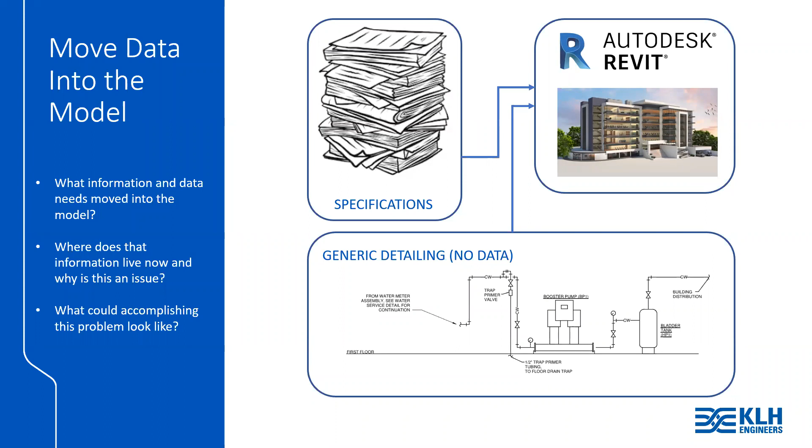So what are the solutions to these two problems, essentially? Two initiatives that got started at KLH as a way to address this were, first, to just get rid of them. So the two goals: the first one is eliminating that generic detailing. So how do we do that?

You can see that kind of booster pump bladder tank example from the previous page. This is what we show. So what do we really need to be doing? You can see that this is really what we want installed, and what we really should be modeling, in order to give the contractor what they need to install. So this is...

Kind of the same setup. It's essentially fully modeled—it has all the valves, all the families, all the piping modeled. Essentially what replaces the generic detailing is, it could be a section view like what's shown here, that's fully detailed, outlining what everything is. You can see it's even got some dimensions on it, that really gives the contractor a good idea of what my design intent was as an engineer.

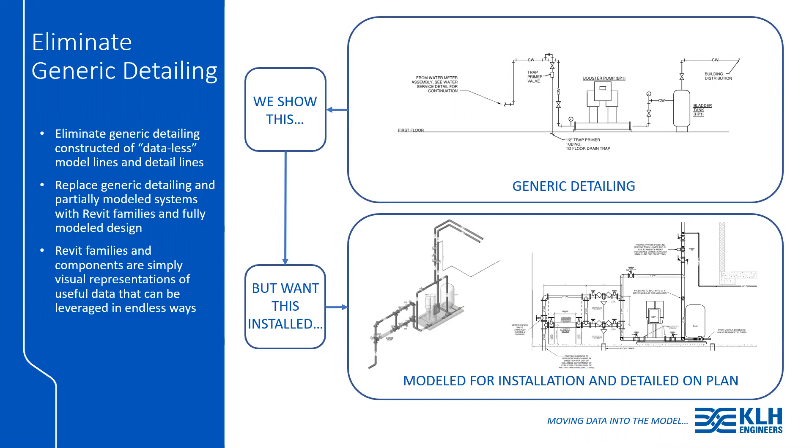So that second goal that we started at KLH was essentially to eliminate specifications as well. And we quickly learned when we set out to tackle this that the first thing we needed to do was basically look at our specs, comb through them, and eliminate redundant, useless information. We were kind of surprised to see how many times the same information may be repeated over and over again in specifications—sometimes even contradicting themselves, which just adds confusion to the contractor.

So this was kind of our initial result. Here you can see all the disciplines listed, and these are some pretty serious values here. From HVAC alone, we eliminated 781 pages from the specification. 76 from fire protection, 61 from plumbing, 249 from electrical, and 161 from technology.

So once we got that redundant information out of the specifications, we needed to keep going—thinking about how we're going to keep chipping away at our specs. And essentially, as an example here, the way to do that is you start showing information that's in the specifications on the plans themselves. So you can take...

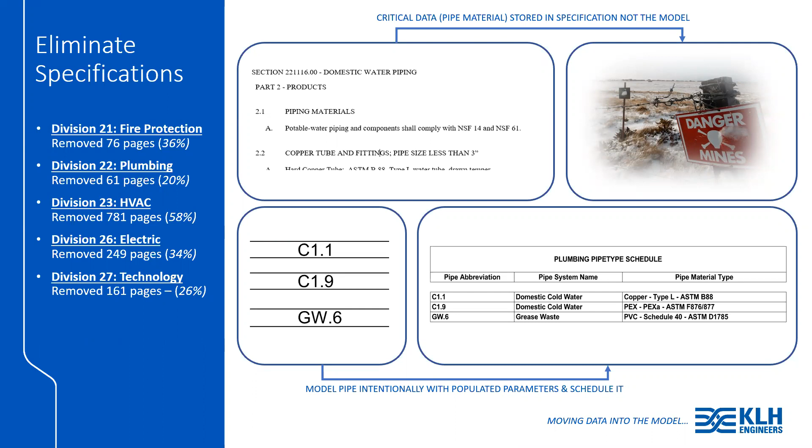I'm going to play a video here, but this is a tool we created that the technology team uses. It's called Plate Designer, and they essentially use it to build each specific data plate that exists on the job as they're placing it. This is voiced over, so I'll see how the volume is.

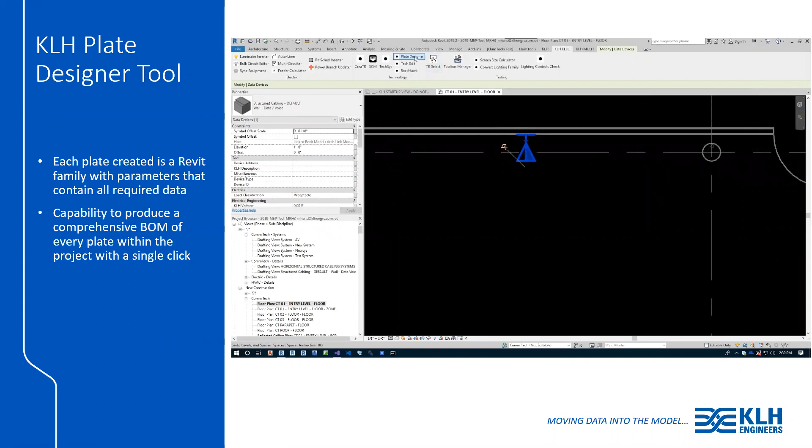Plate Designer is one of the tools available for designing technology systems. This tool allows us to take an ordinary data symbol and add more information to it. For example, I can design a plate and specify the number of gangs, specify the color of the plate, and add connectors to this.

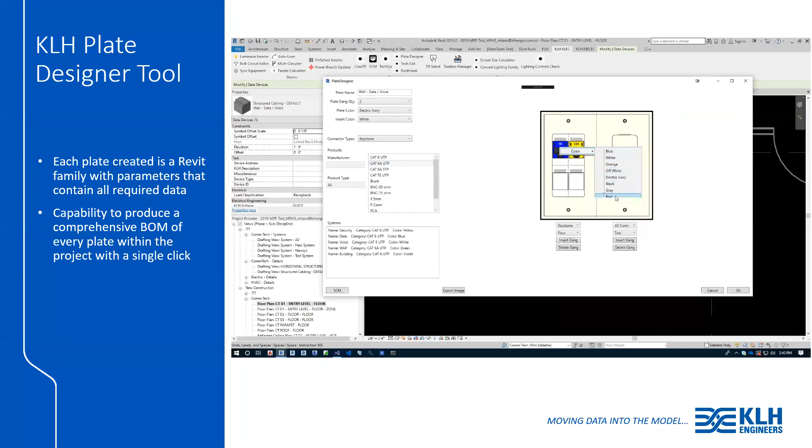Now, by adding these connectors, I'm doing more than just adding an image to the plate—I'm actually adding the product that contains a model number. These model numbers can be used to develop a bill of materials for this plate and all the other plates on the project. I'm able to change the color of a connector without adjusting the model number.

I'm also able to add structured cabling system connectors that are defined at a project level, as well as AV connectors that could go to a local AV system.

So essentially, the old way of placing these things was a generic symbol on plan. It was a Revit family, but it did not have good data. So what this is doing is associating with that specific family, in this case down to a manufacturer model number, what that exact plate is.

So you can imagine, if you had done this for your entire job, we could have the ability to pull a report from our Revit model that has the exact count, model number, etc., for every single one of these things in the job.

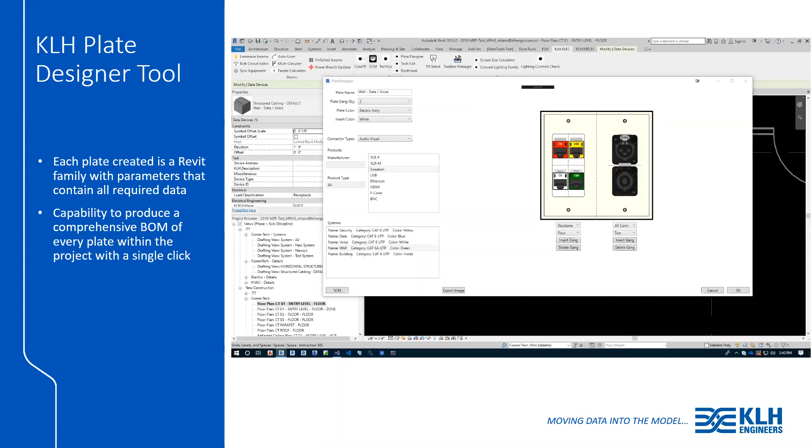I wanted to touch on point cloud integration, since we're in this 'move data into the model' category. Like I mentioned, here at KLH we have a BLK 360 building scanner. It's not the perfect fit for every job, but it can have value.

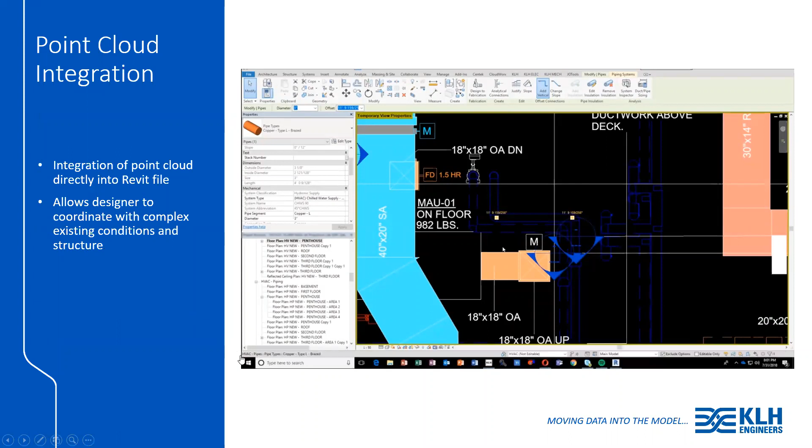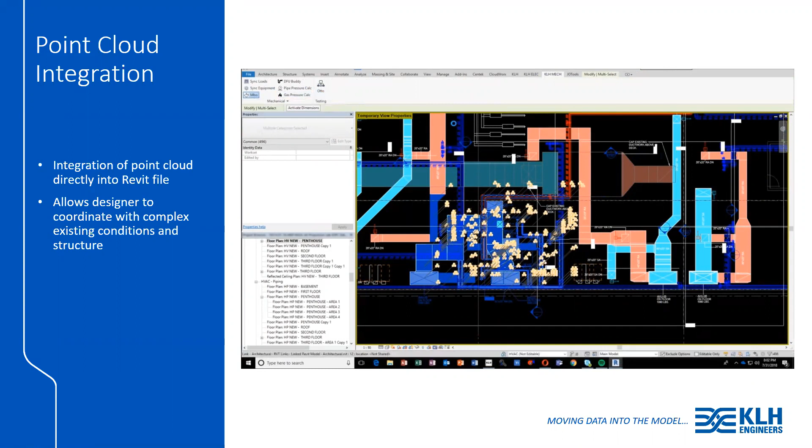I think you'll see in this video—start it right now. Essentially, you can see a somewhat complex ductwork plan. He's going to use another tool we made; he drags a box, and it quickly makes a 3D isometric view of just those elements.

He's going to mess around with it a bit, play with some view templates. You can start to see the model there a little, but he's going to tweak the view template more.

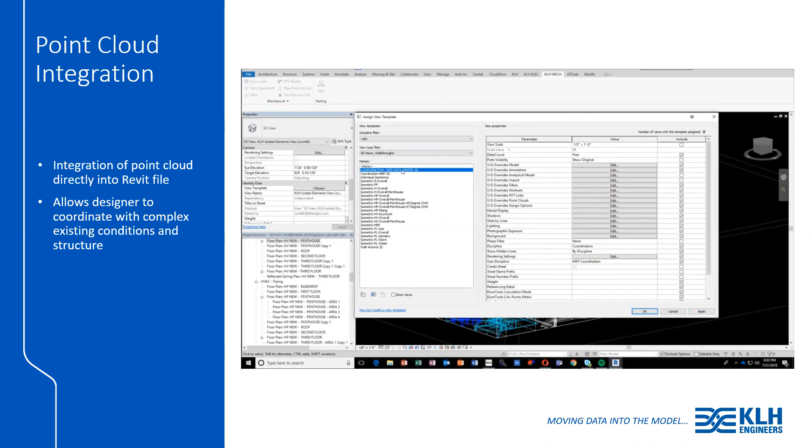This is kind of the view that shows you the best, and he'll start to rotate it around. You can see these cross-structural members here. I think he's going to rotate it some more—these guys right here, coming out of the ground.

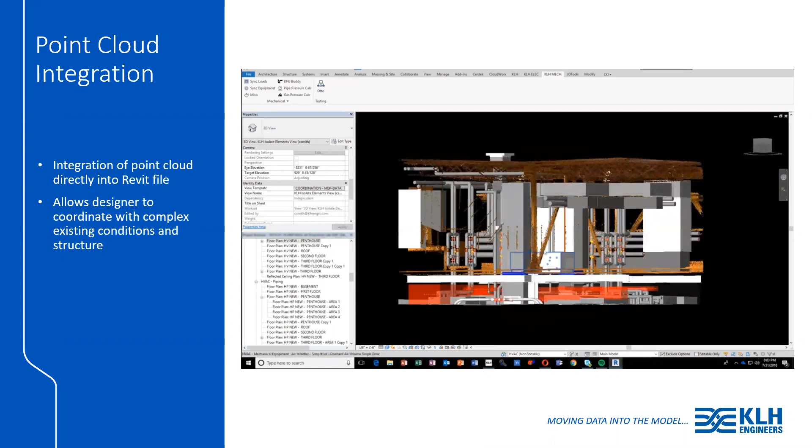You can imagine, on a more traditional site survey, an engineer may be trying to filter through 1,000 site pictures, trying to get a good idea of what obstructions may be in this specific area. These structural members coming out of the ground at an angle are something that could really easily be missed.

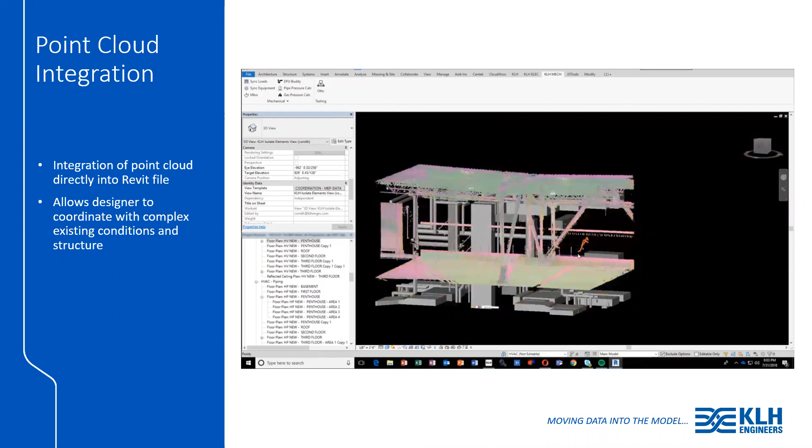And when you're running large ductwork where alternate routings aren't just going to be coming a dime a dozen, having that information when you're actively modeling can save a lot of heartburn down the line when you're trying to get that ductwork installed.

Does anyone have any experience modeling with a point cloud—remodel, or beneficial, or yeah?

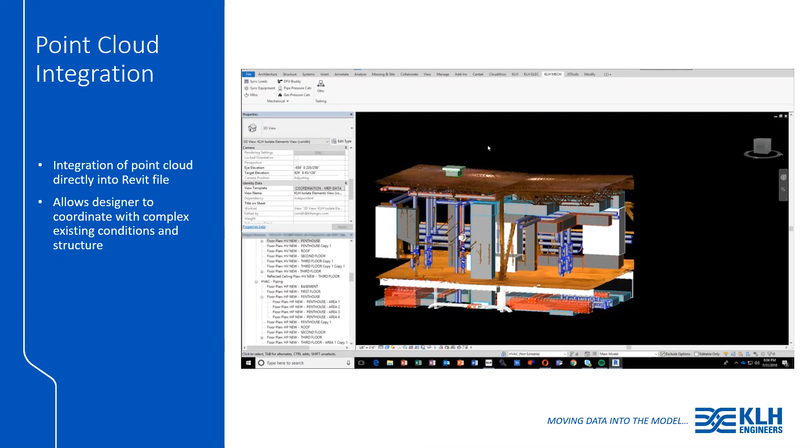So, the title of this slide kind of says it all. We've been talking about moving data into the model and how important that is, making it a better model. But why are we doing that overall?

At KLH, essentially what we've done is mirrored the data in all of our models into a single database that we can manipulate and organize however we see necessary. So what that's doing is maximizing the data that exists in every single one of our Revit projects.

So you can imagine, if you wanted to look at the last 20 hotels we did, and how many PTAC units may have been on each one, if you don't have this data somewhere where it's searchable and you can work with it, you're not going to know the answer to those questions quickly.

So I just wanted to touch on this—why the data is important here at KLH for us.

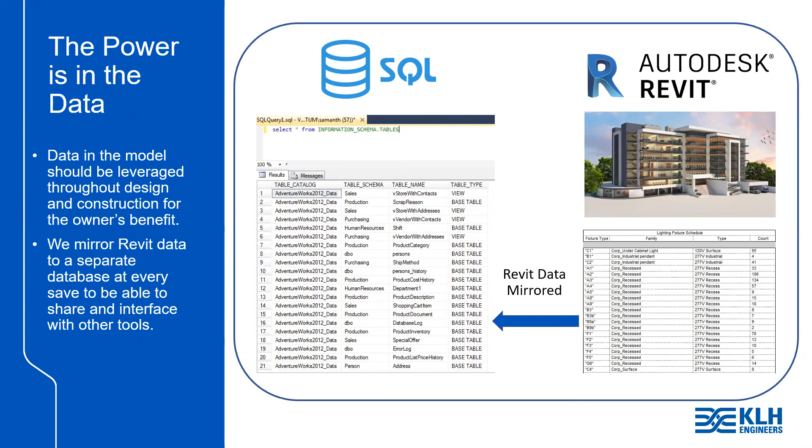So the next topic, we talked about moving data into the model. We're going to go into achieving that coordinated model. I know we're all familiar with the terms clash detection.

Software. I've never really heard anyone arguing why clash detection is important and how it can be a positive thing. It's never going to be a bad thing if I find out that I drew a 10-inch storm pipe into 24-inch by 24-inch stuff. Knowing that that's happened is always good.

The problem that I always hear with clash detection when I'm talking to architects and engineers is that the current software that is out there on the market just isn't cutting it for their workflow or for how they're set up, for various reasons.

Inefficient in the sense that it's not fully integrated into the Revit model. It's an iterative process. I'm exporting models maybe into another program, seeing what the clashes are, maybe then I'm going back to Revit, making some adjustments, then I'm exporting again. It's kind of an inefficient process.

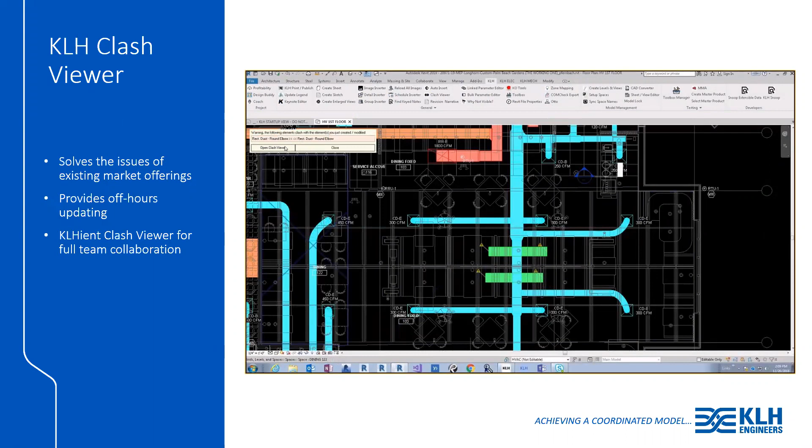Makes sense. I can actually launch the real-time clash viewer window. These are all the clashes that are in the project, listed and organized by priority factor, which is a factor of the volume. So a 1,000 cubic foot duct is going to be higher priority than a half-inch pipe.

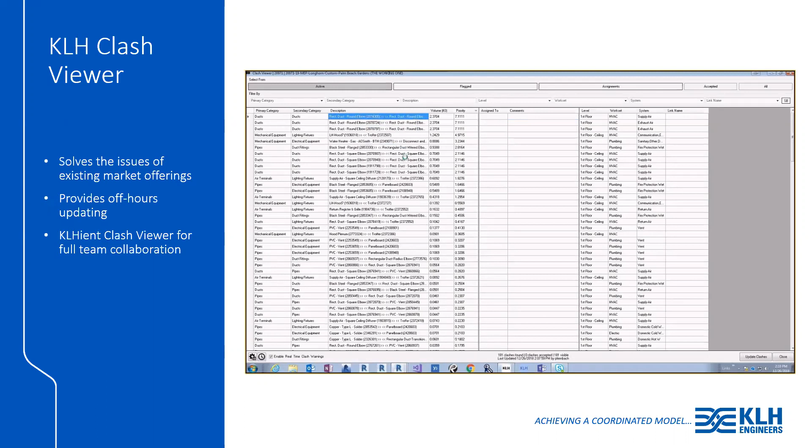I can go through these clashes. I can assign them. I can flag them. I can accept them, and I can also put comments on here. And I can show the clash in a 3D isolate view to make it easier for me to navigate and understand what's going on.

So you can kind of see from that video how what we developed really helped touch on all the pain points we had from the out-of-box software. He essentially drew a duct through a duct intentionally, for the purpose of the video, but you could see a pop-up screen kind of come up here in the corner, told him right away that he drew something that would not work in the field.

And one of the biggest things for us at KLH is, right now clash detection is kind of viewed as really reactionary and really far down the line of the construction process, where essentially the design is getting completely done by all the engineers, all the architects, and we get the model, and then clash detection starts. Just kind of backwards from how it should be.

So this tool is allowing us to be coordinated with ourselves, be coordinated with all the models that we have linked in to our models.

So that was kind of our first goal, essentially get clash detection software that solved all of our issues and worked for us. That's great for us at KLH, obviously. But what's the progression? What's the next thing?

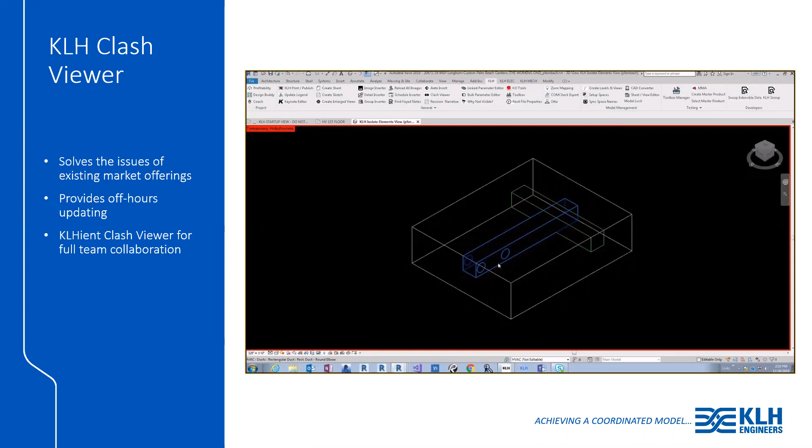Whereas typically what we'd be doing is sending a screenshot saying, hey, I need the wall changed from 2x4 to 2x6. We might have a couple more back and forth emails, they may be making changes in their model, and a week later we might get an updated model and finally the wall is 2x6. So it's been working out well for us.

All right. We've got some data that we've been tracking on all of our Revit models across the entire company.

So what we did is basically every new project that got set up, the live Clash Viewer was turned on, and every user had to make a conscious decision to turn it off.

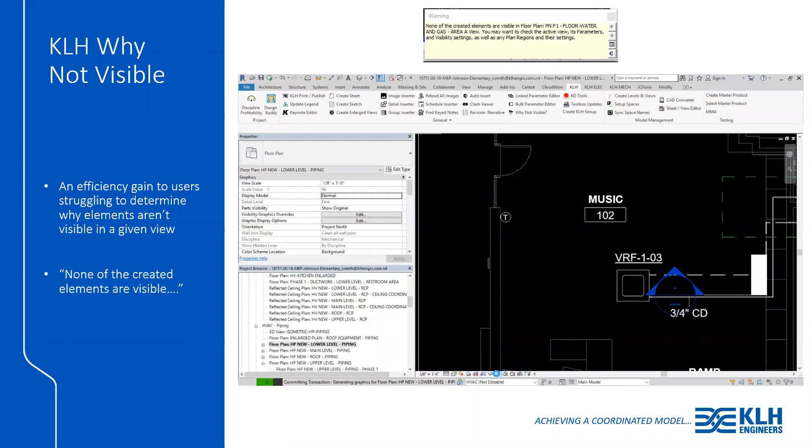Essentially, this is an HVAC plan, and we can't see the lighting fixtures, which would be important if we're placing a ceiling cassette or something like that. We don't want to place a light and a ceiling cassette in the same spot. So he revealed all hidden elements and clicked on what we want to see — we want to see the light, right?

After we did that, this is a list of all the views in the model. We're going to search for the view where we can't see it, select it, and run the tool. I'll try to get this stopped so you can see it. Yeah, I think it's stopped.

So it says element is hidden because light fixtures category is turned off in visibility graphics. So I know if I go to my view template — hopefully I have one applied — if I don't, I just go to my visibility graphics, go to model categories, turn the light fixtures on, and I'll be able to see it.

This list, like I said before, could be 6 items long. When I first started out, this was the most frustrating thing to me about Revit — not knowing why I couldn't see something. So it's been a great tool and a time saver for a lot of people.

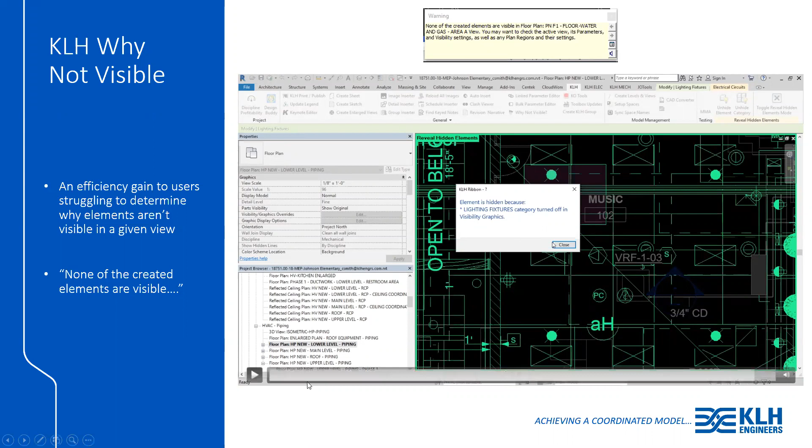All right, so the third category I'm going to talk about is improved visualization to the field. This essentially requires the two previous items I've been talking about, proper clash detection and having as much data within the model as possible. That's what's going to make using these items possible.

So the first item I'm going to talk about is QR codes. I know we're all familiar with QR codes. They're pretty much everywhere these days, across any market or industry. You scan them on your phone. Pretty much any smartphone will do it automatically if you open your camera and scan it, or through an app, and it'll take you somewhere for more information or advertising.

But these are actually very good for helping show intent on the plans themselves. So the example here is of a mechanical room, enlarged, with three fan coil units and a lot of ductwork in plan view. You can imagine without having either of these two images, it could be very challenging for the contractor to know how I wanted that ductwork routed, and it could easily result in them routing it a completely different way that may interfere with surrounding trades.

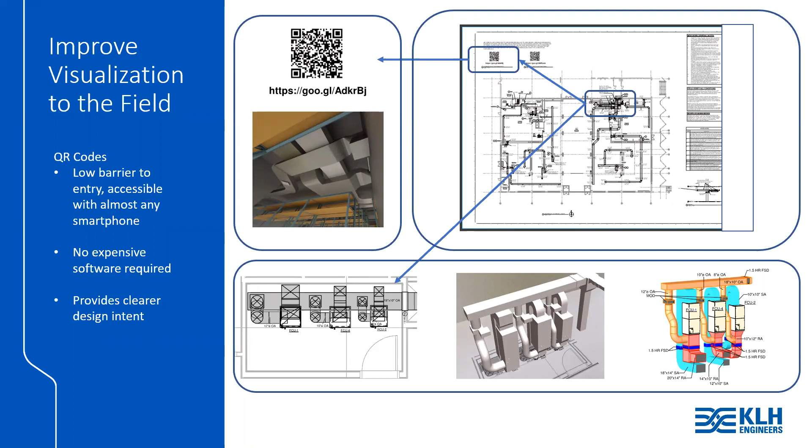I know we're starting to run over a little bit here, so I'll try to hit these last couple points quickly. This is kind of the next step up from QR codes, probably a little less accessible in the field, I'd probably like to have at least a tablet size screen to work with this. But it's essentially a portion of your Revit model that you've predefined and exported as a 3D PDF. We use Bluebeam here at KLH, and they have a 3D PDF add-in you can put into Revit and export 3D PDFs.

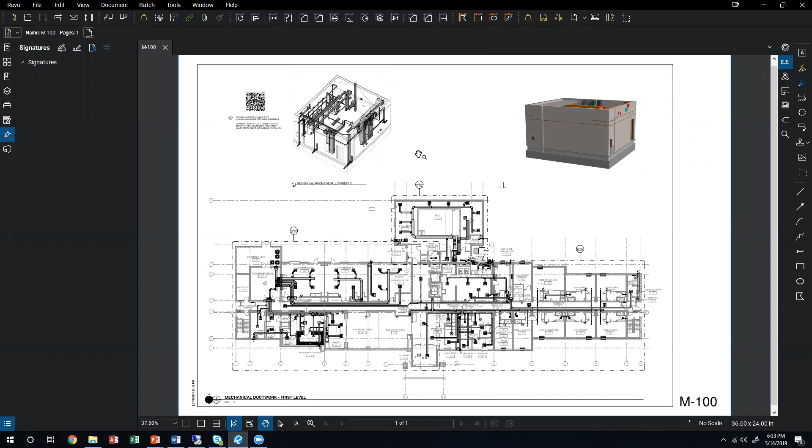Got one just real quick here, let me show you the power that it has. So we have the QR code here that would give you some insight into this room, but if you were in a client meeting talking with contractors, this screen up here is actually a fully interactive model of that space. I can click on elements in here, I don't have the properties window up, but you can see all the parameters of that item and what those values are. You can cut sections, slide it around, kind of see, if what the view was set up doesn't give you exactly what you want.

So there's some increased functionality there that could be beneficial. You might want to look into that too. You're linking to Bluebeam? The PDF is embedded in the drawing file. But I don't think you need to see it in Bluebeam specifically, you can use a normal PDF. I believe you can see them in Adobe also. It might not have 100% of the functionality within Bluebeam, but yeah.

I think we do have a reviewer too. Yeah, the reviewer will let you see the PDF. You can't make any changes to it, but the reviewer will let you spin it around and check all the properties.

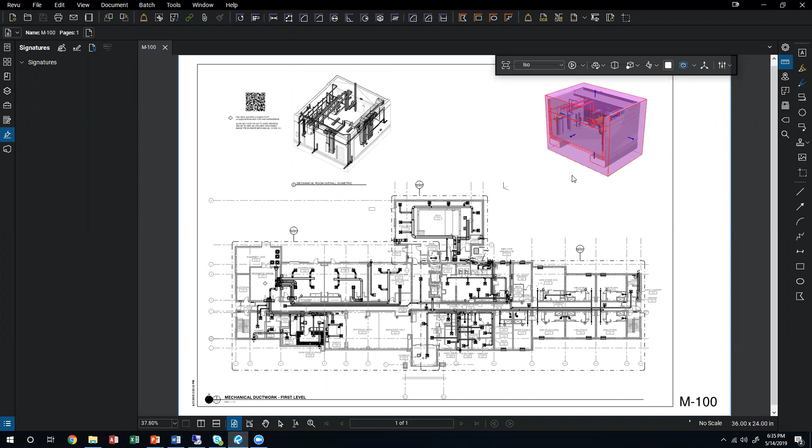I use full model 3D PDFs of the structure to send out to people. This is what we're thinking of for beams and columns. It's a nice thing to look at on a screen like this instead of looking at the Revit model waiting for it to render every time they twist it around.

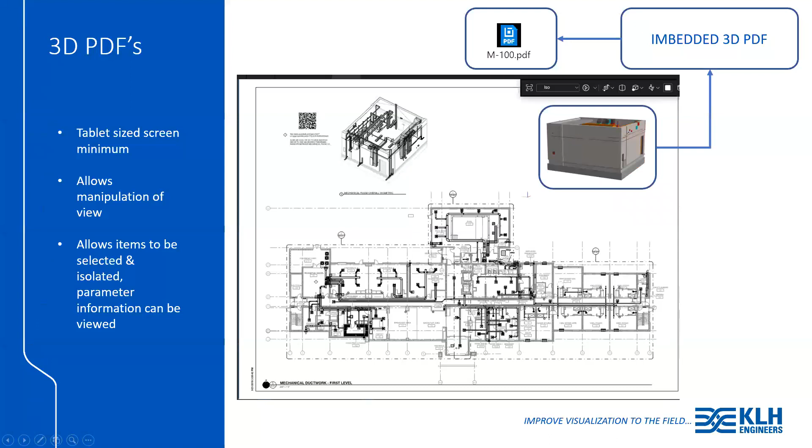So that was 3D PDFs. Real quick, circling back to the data, I talked about having a database where all the data from all the models across our company kind of lives. There's unlimited potential you could do with all that data. An example I like to give is if an engineer comes across a room they've never designed before, maybe it's a kiln room in a high school. The old way of figuring out what needs to be done is asking the guy next to you, maybe he's done it, maybe he hasn't, maybe it's the third guy you ask, and they're trying to remember what the project was. But as an example, if you had this database, you could look at every kiln room your entire company has ever designed and the elements that lived within that room. That's just an example of how this data can be used.

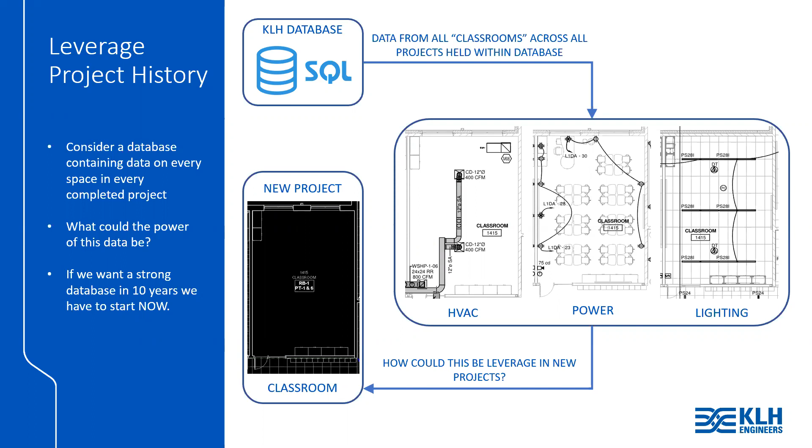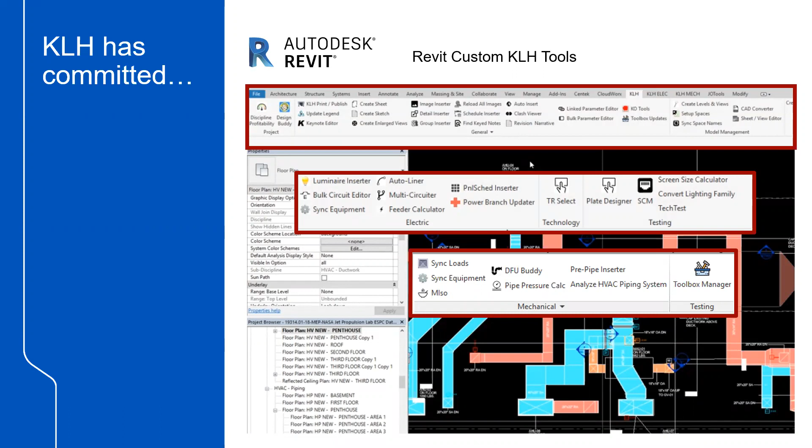I was counting trainings on our intranet. Today we've got like 70 trainings for tools that we've developed, so it's really taken off since we started making them.

Any last questions, comments? No? I want to add something real quick.